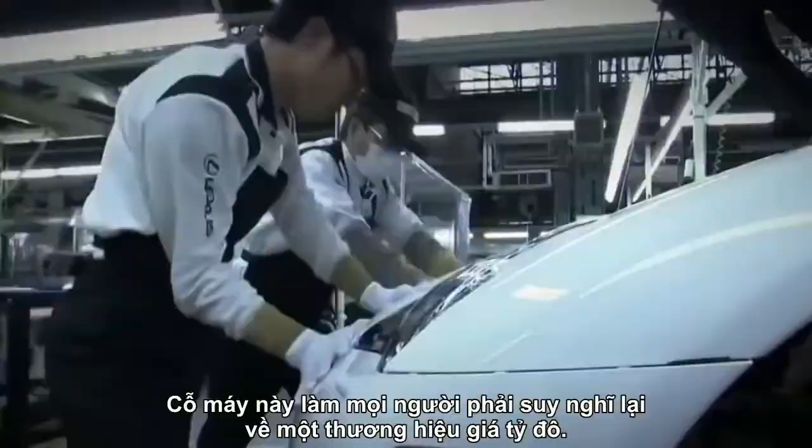A car like no other is taking shape. Craftsmen hand-build what they consider an automotive work of art. Money is no object. This machine must redefine a billion-dollar brand. Failure is not an option.

Japanese marque Lexus sells itself on luxury, marketing its cars as elegant, quiet, high-tech, and efficient. Now, a different kind of car wears the Lexus badge, the LFA. Aggressive, loud, agile, with the highest revving V10 engine in a production car, reaching 325 kilometers per hour. A car like nothing Lexus has ever produced before.

Lexus is just over 20 years old. The world's largest car maker, Toyota, created the brand to compete with other high-flying luxury marques like Mercedes-Benz, BMW, and Jaguar. It's worked. Lexus is now one of the biggest-selling high-end marques in the United States. But now, Lexus is out to inject more excitement into their brand.

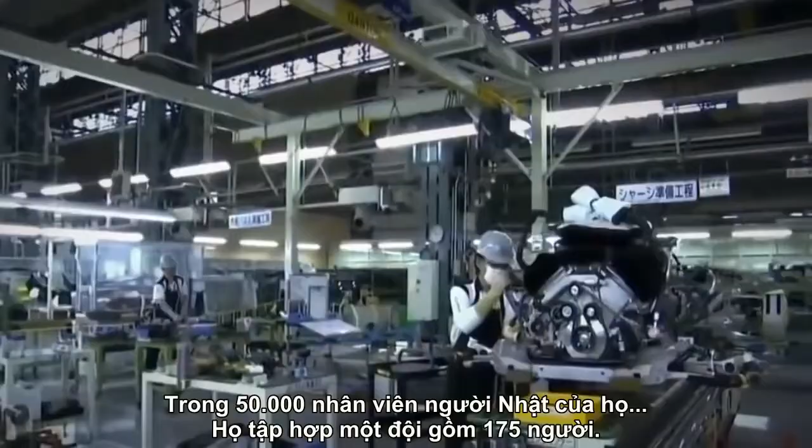The company transformed two unassuming blocks of this megafactory to create the LFA. They then scoured Toyota's 50,000 Japanese workforce to handpick just 175.

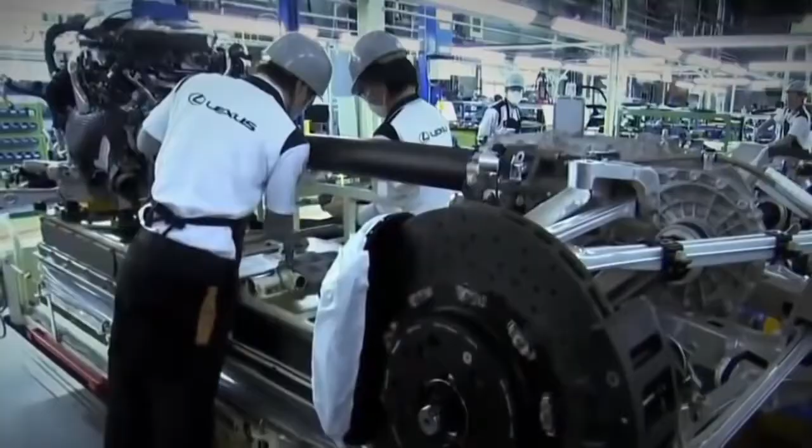All the associates here at the LFA Works feel they are artisans, not just operators. These artisans are known as takumi, Japanese for craftsmen, a status only conferred on the most highly trained, skilled workers. Each and every associate at the LFA Works is seeking to achieve perfection, taking this challenge on with a sort of samurai spirit.

Yamanaka Shigeru is manager of the LFA Works. His teamwork credentials come from another time-honored Japanese tradition, baseball. Before this, I was working as manager of the Toyota Motor Corporation baseball team, which brought people together from lots of different backgrounds. It was because I could manage that organization that I've been made manager here.

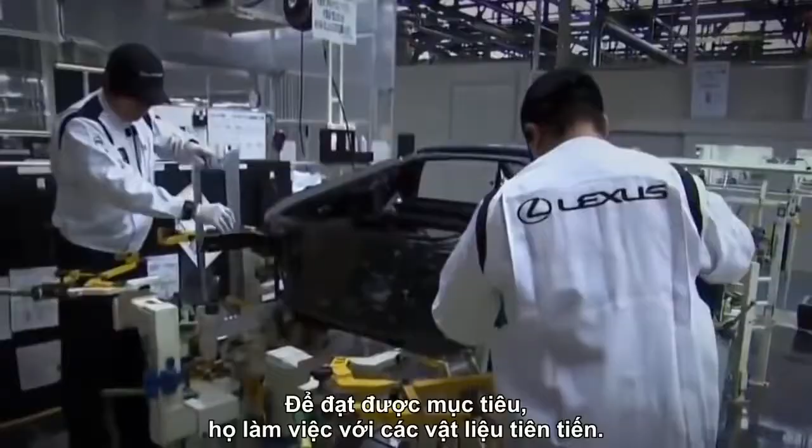To reach their goal, the tight-knit team utilizes sophisticated tools and materials to build the car. The most important of these is carbon fiber composite. Carbon is crucial to the car's performance. It's a material five times the strength of steel, yet a quarter the weight. It's the construction material of choice for both Formula One racing cars and the aerospace industry.

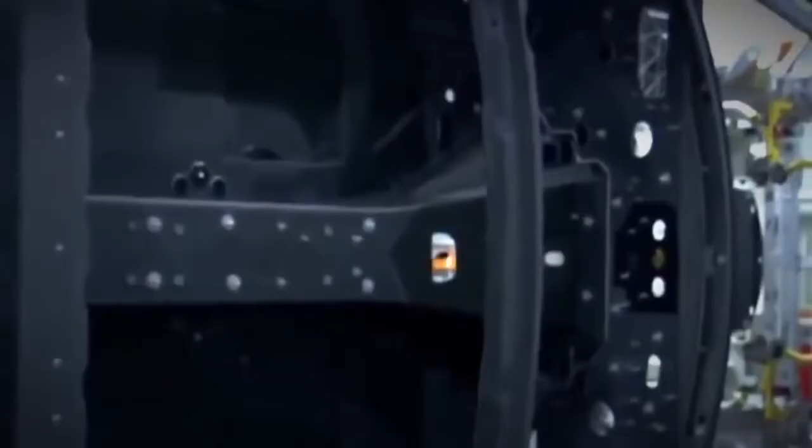The company even makes their own carbon fiber here on site. Up until now, no television cameras have ever been allowed inside this top-secret facility. First, simple strands of carbon fiber are woven into a pliable cloth using an automated weaving machine. This fabric is then transformed through heat, pressure, epoxy resin, and labor-intensive techniques into the car's core, known as the tub.

The tub is pieced together like a 3D jigsaw. It starts with the construction of the floor. To make it, precisely cut carbon fiber cloth is lifted onto a mold. Next, skilled takumi smooth the supple fabric over the mold. This one is for the transmission tunnel that will house the drive shaft and exhaust.

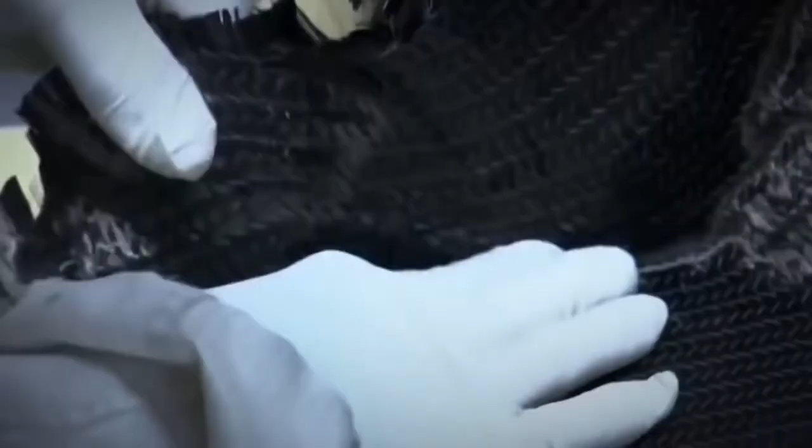In very complex areas like this, the fabric inevitably becomes frayed and not very neat. The associates work with these areas as if working with silk, taking great care every day. They also wear masks to avoid breathing in the hazardous fibers. In the beginning, the associates found it very difficult to work this material. It was much easier when they used an iron.

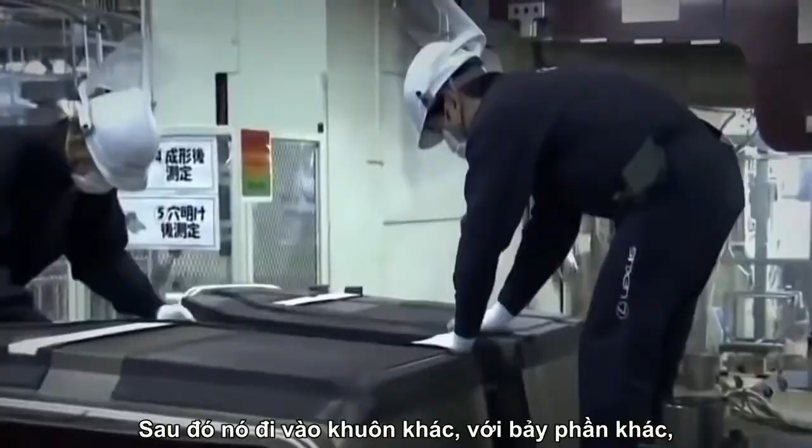The completed part is grill heated to set its shape. It's then fitted into a template, along with 7 other floor parts, and inserted into a 1,000-ton press. A glue-like resin is pumped into the template, and the whole section is baked for 8 hours at 130 degrees Celsius. Under this pressure and heat, the resin sets hard, binding the individual parts together to produce the car's floor panel.

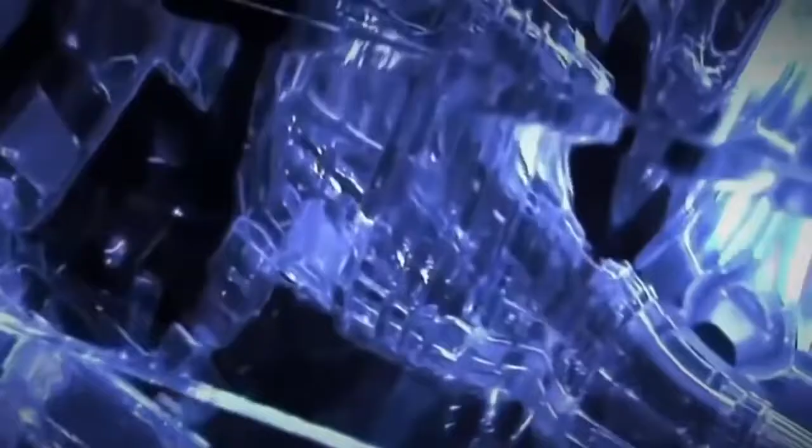Back in 2000, the concept of a world-beating supercar only existed in one man's head. At the company, I talked to just a small group of people at the top, not expecting anything, and they said, go ahead and try.

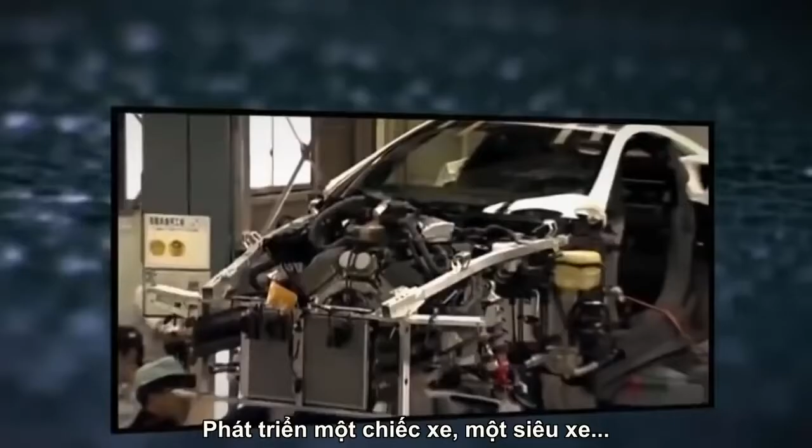With permission to proceed, Tanahashi gathers a team of engineers around him, and they start to make the basic engineering decisions. In the beginning, we planned to make the body from aluminium. But Tanahashi is fascinated with the possibilities offered by carbon. Developing a supercar, a super sports car, carbon fiber was a material I really wanted to try using, if at all possible.

But this wonder material has its drawbacks. It's expensive, and the company has never used it to build any of their cars before.

Despite these significant challenges, Tanahashi gets his way. In 2005, my boss said, why not go for carbon? Slapping me on the shoulder.

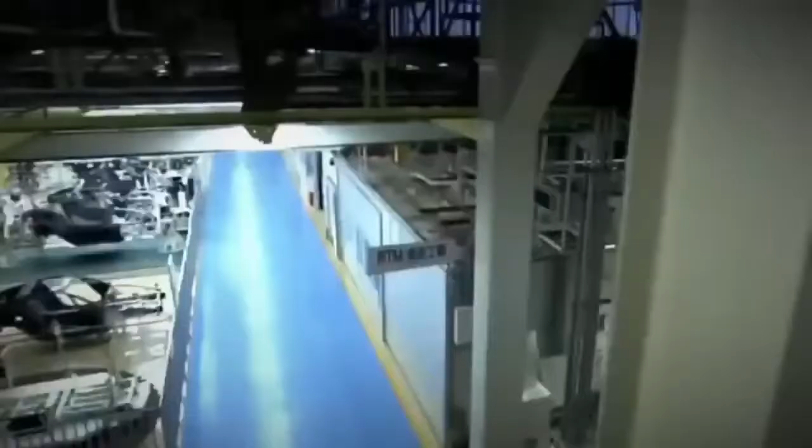And I made the decision to go for carbon then. It's a bold step. Everyone involved with this project must master a material they have no experience with at all. It was the first time the workers had touched carbon, and everything about it was difficult for the workers.

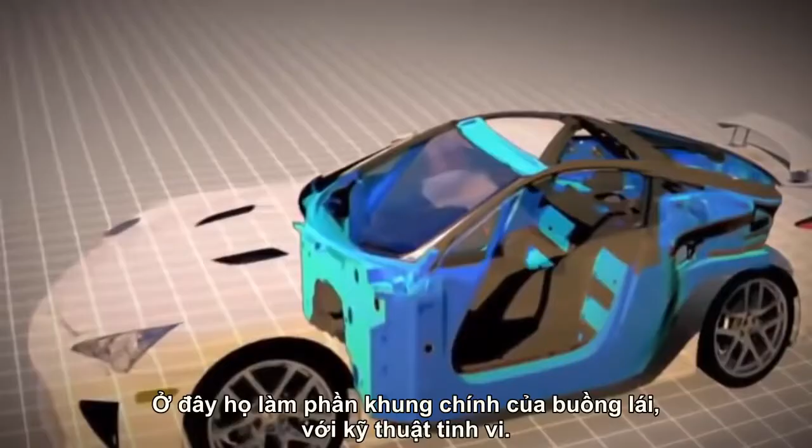In the state-of-the-art carbon fiber facility, the Takumi are returning from lunch. They vacuum themselves down to remove any foreign particles before entering a highly confidential sealed room. Here, the majority of the tub's central frame is created using the most intricate techniques.

In this process, an automated laser cuts out hundreds of individual shapes from carbon fiber cloth that's been pre-impregnated with a sticky resin.

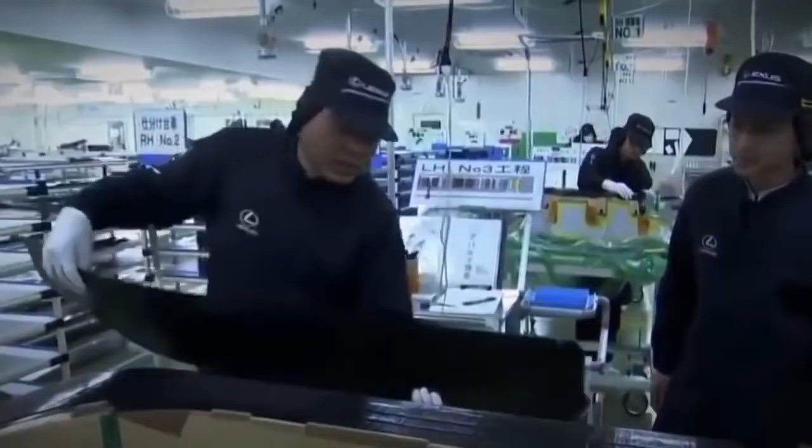Next, Takumi layer the cutouts, up to 20 sheets deep, onto a mold. This one will make the right side panel. The associate uses a dryer to raise the temperature of the laminate and half melts the resin as he applies it. The tacky cutouts stick to each other and any gaps are squeezed out using a vacuum bag that forces them together.

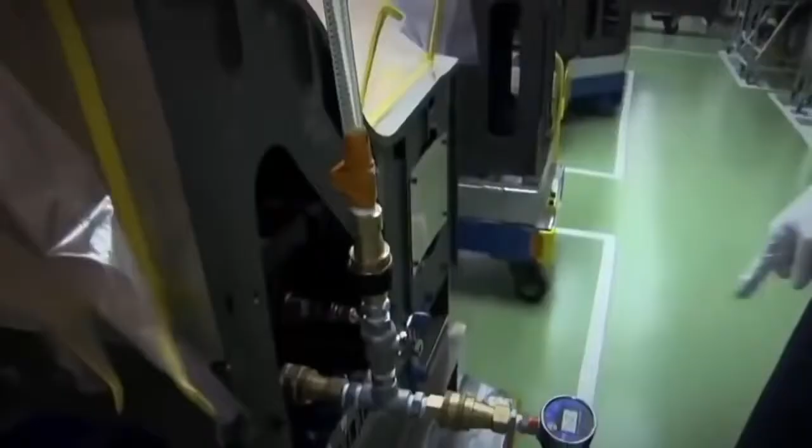The shrink-wrapped side panel is then wheeled across the works and loaded into a pressurized oven. Baking overnight at 150 degrees Celsius sets the resin, resulting in a side panel that's both ultra-strong and ultra-light. An aluminium equivalent would be twice as heavy.

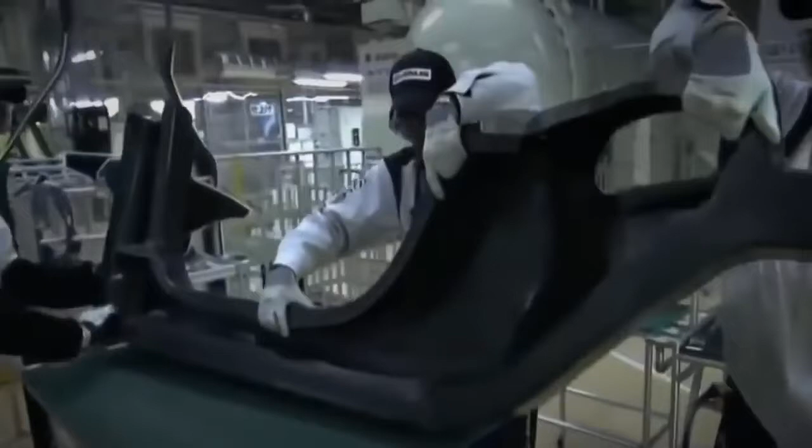Weight saving is the holy grail for all auto engineers. Less weight and more power leads to increased acceleration, and speed defines a supercar. The body of the LFA is 65% carbon fiber, helping it accelerate from 0 to 100 kilometers per hour in 3.7 seconds.

If made of aluminium, it will be 100 kilograms heavier, like having a sumo wrestler in the passenger seat. As it is, this car weighs just 1,400 kilograms all in.

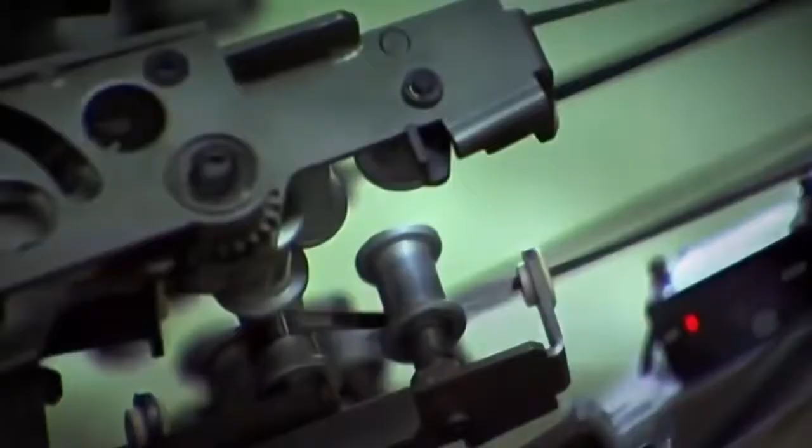Back at the factory, in a locked room, a bespoke machine creates two crucial parts to complete the tub's construction. The roof rails support the windscreen, as well as protecting the driver if the car rolls over.

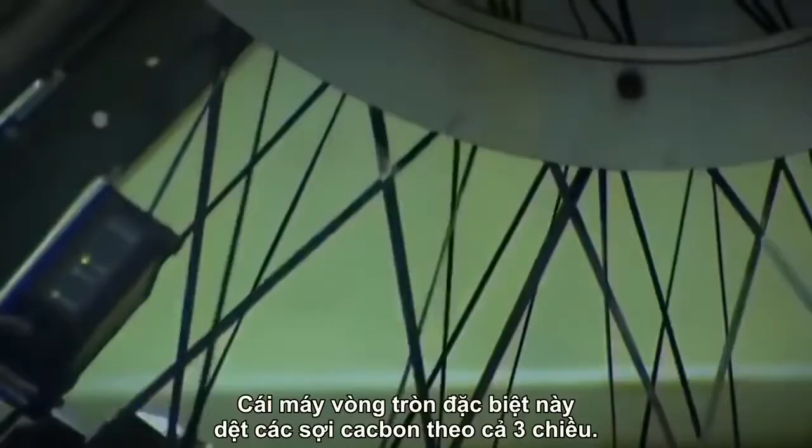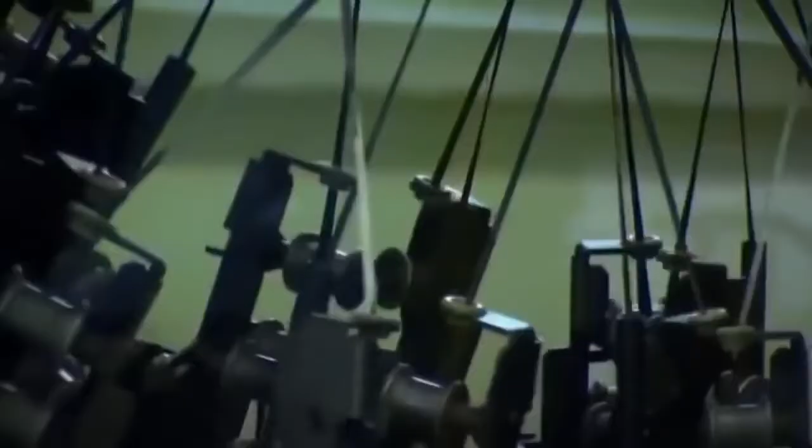This custom-built circular loom weaves the carbon rail in 3D. It uses lasers to control the feed of carbon fiber strands onto 144 bobbins. These knit the carbon around a top-secret automated template that's fed through the center of the loom. This is done twice over to cross-hatch the carbon weave, so giving the rail its strength.

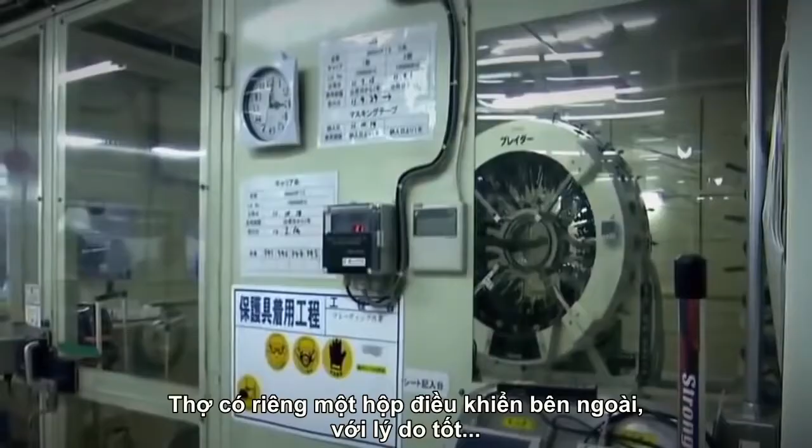The whole mechanism has its own control box, and for good reason. If something goes wrong, even a little thing, the shape gets distorted immediately, so the operator constantly pays attention to avoid this.

The side rail is heated and impregnated with more resin to complete its metamorphosis from a flexible tube to a rock-hard rail. You may think that this is quite heavy, but it is only 2 kilograms.

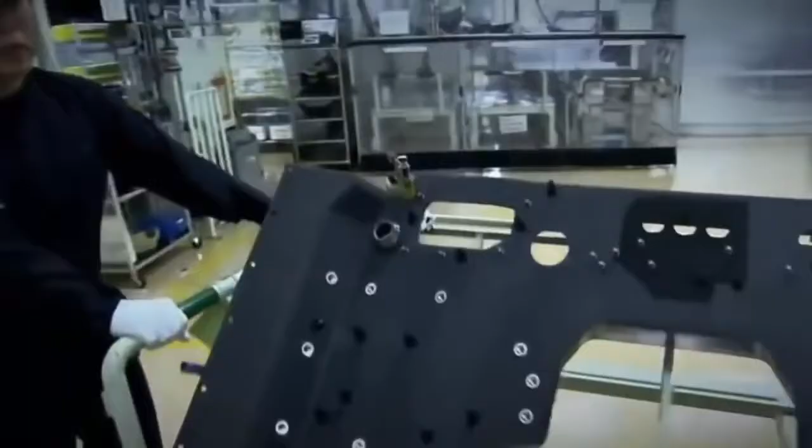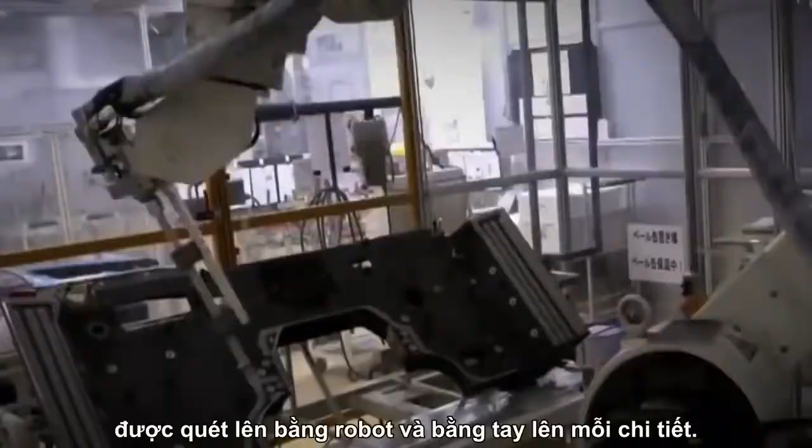The tub is bonded in another top-secret jig. First, a super-strong adhesive, known as epoxy resin, is applied by robot and hand to each of the parts. The separate parts are transferred to the jig and locked in place. Pop rivets keep the pieces aligned.

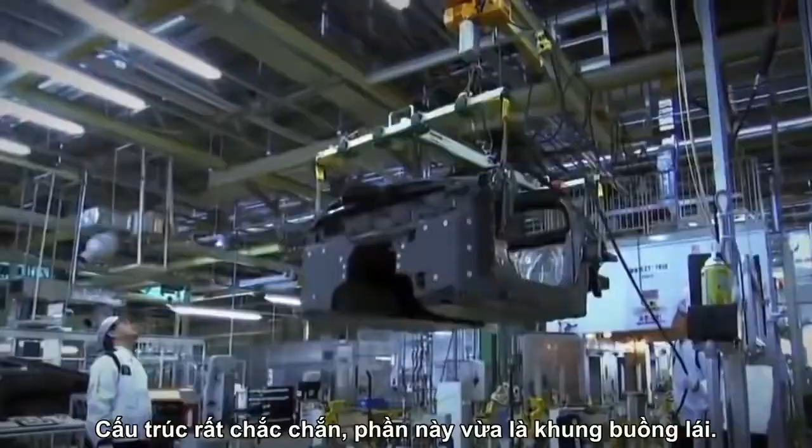To cure the epoxy, the jig is pushed into an oven and then baked for 60 minutes at 60 degrees Celsius. The resulting tub is so strong, it acts as both the structural core of the car and as a crush-resistant safety cell, should the car crash.

The challenge now is for Matsumoto Kengo, chief designer of the LFA, to create a car with a body as technical as it is elegant. For us, aerodynamics, heat and airflow management should be tangible in the design.

A conventional car cools its engine with forward-mounted radiators that suck cold air through a front grille. Not the LFA. Front space is at a premium, so coolant is pumped from the hot engine to twin radiators mounted behind the car's rear wheels.

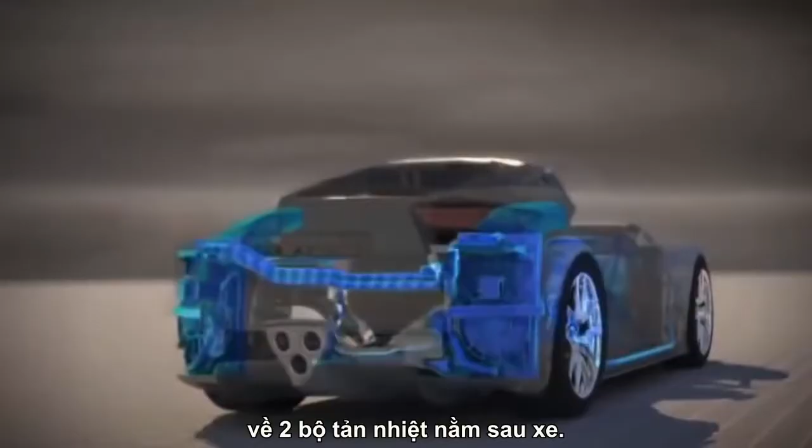Matsumoto had to shape the car to funnel cold air to these vital components. Airflow management is optimally controlled by setting the angle between the door mirror and the cabin. It goes past the cabin and smoothly into the air intake for the rear radiator.

This shape is not just for styling. The intake is deliberately formed here, from the base of the glass. The result is an airflow system capable of cooling the engine even under the most extreme race conditions.

It's 8:45 in the morning at the LFA works. The Takumi are warming up for an 8-hour shift ahead.

Their first task is to greet the bare cabin as it arrives from its 15-day build in carbon round the corner. In assembly, the cabin will progress through 4 positions: trim, chassis, final, and alignment.

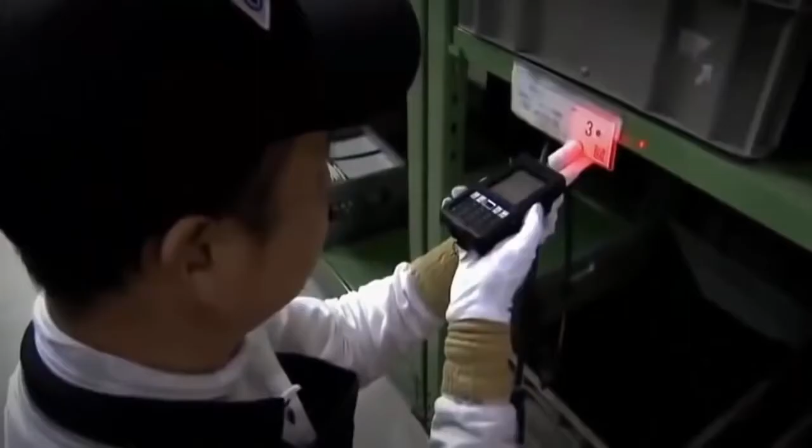15,000 parts go into making an LFA. The first of these are attached here in trim.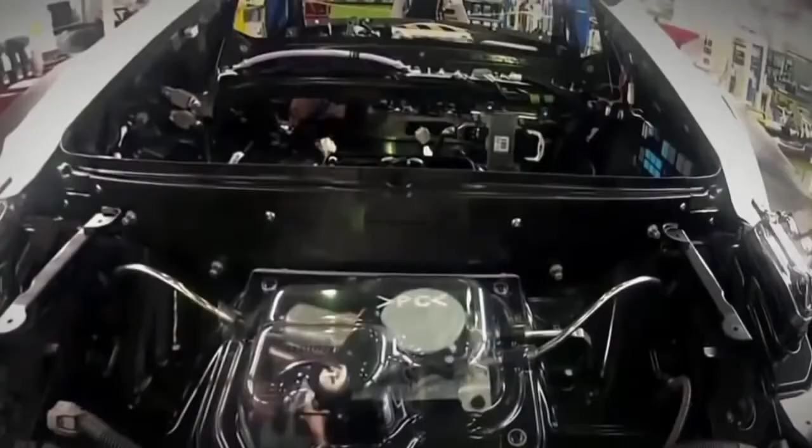Just meters away, other Takumi assemble the drivetrain and suspension. The drivetrain comprises the transmission, torque tube, and last but not least, a 4.8-litre V10.

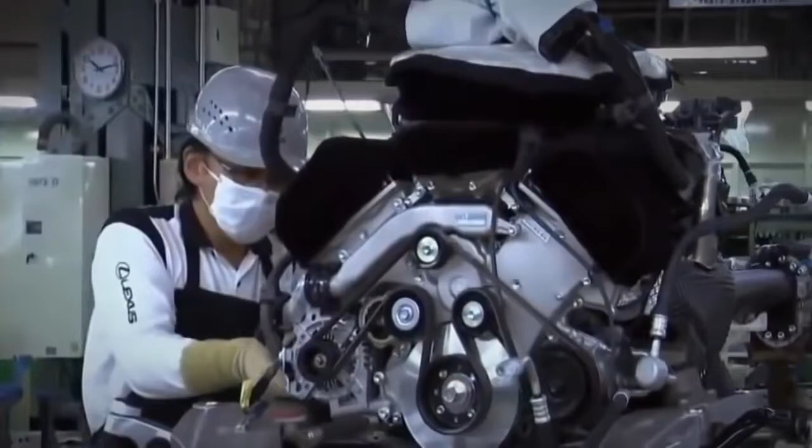The location of this engine is crucial to the car's entire concept. I wanted to build the car around the people in it. And for a supercar that puts people first, the optimum place for the engine is front mid.

This front mid location puts the engine between the driver and the car's front wheels. With the transmission placed at the rear, the driver is in the center and the car feels balanced to drive.

The aim is to make the car's handling as good as possible. But a front mid configuration dramatically restricts the space available for the engine. Tanahashi has a problem.

You need an engine of a certain size with a certain degree of compactness, but you want a high-powered engine as well. Tanahashi needs a small engine to fit in the restricted engine space, but he also needs the power of a large engine because power equals speed.

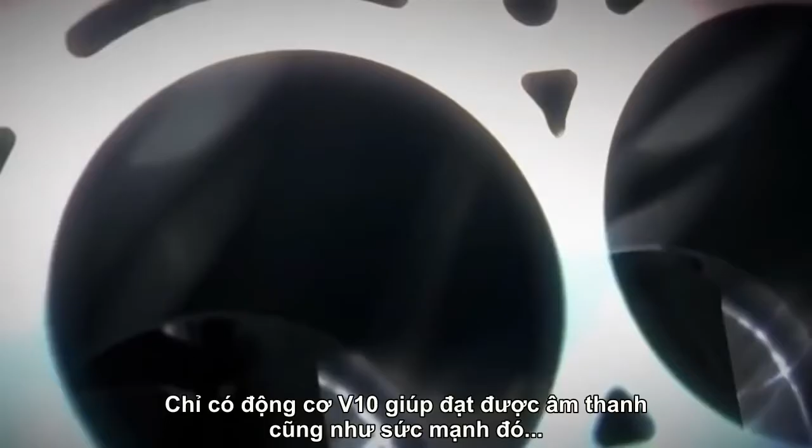And that isn't all. The high-pitched sound of Formula One makes you shiver, doesn't it? I really wanted to have that as part of the LFA. Only a high-revving V10 engine supplies this combination of power and sound, but a traditional V10 is too big for

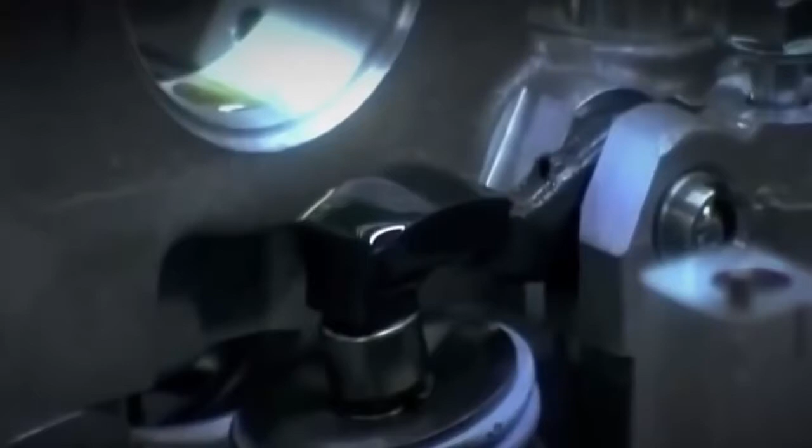his mid-front configuration. Lexus have made nothing like this before. Their production line cars use 6- and 8-cylinder engines engineered for a super quiet ride. This V10 will be the opposite.

Tanahashi turns to some old friends for help. We are a motorcycle manufacturer. We understand power alone is not enough in a vehicle. For a sports car, small and lightweight is critical.

For almost half a century, Yamaha have worked with Toyota to create high-powered lightweight engines and cars. The legendary 2000 GT, star of the James Bond film You Only Live Twice, and Japan's first true sports car, was the first fruit of their collaboration.

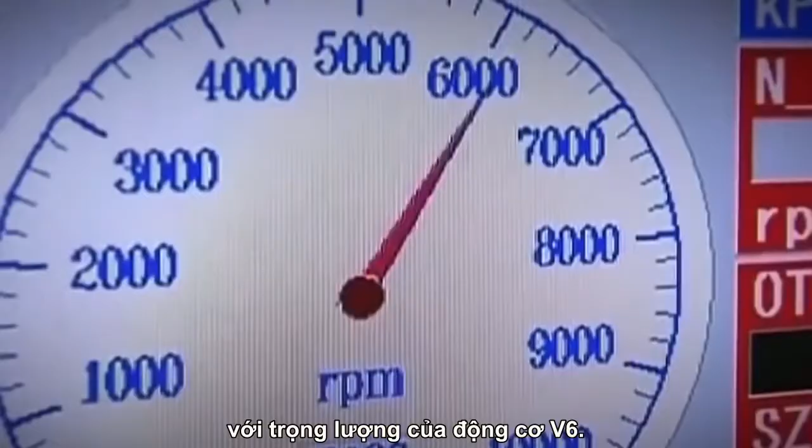Headed by Lexus engine guru Okamoto Takamitsu, the team sets itself an ambitious goal: to create a naturally aspirated V10 engine as compact as a traditional Lexus V8, with the weight of a V6. I wanted to create something different to any other supercar engine.

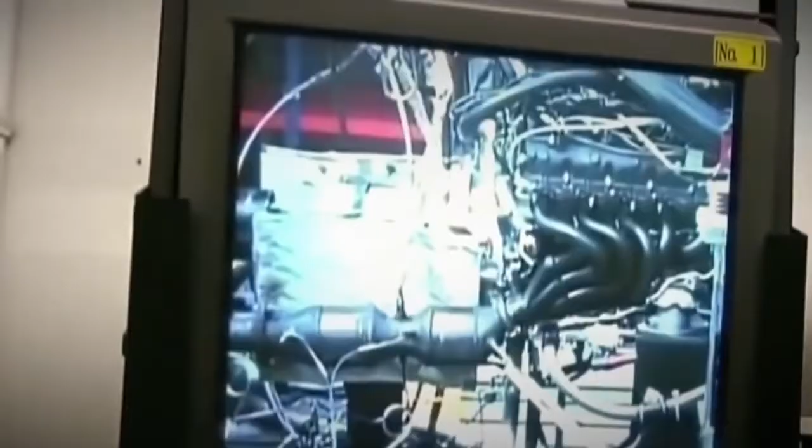Normally, engineers use turbochargers to boost the output of smaller engines to simulate V10 power. But turbocharged engines don't have the rapid response, acceleration or sound of a naturally aspirated V10.

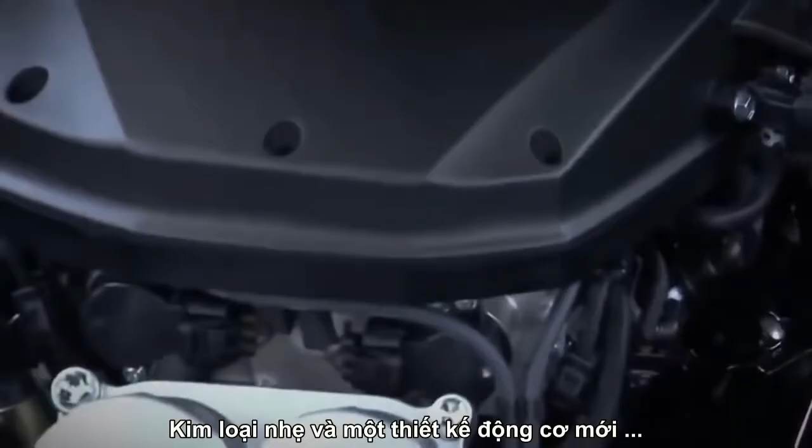By using Yamaha's motorcycle know-how, the lightest metals, and redesigning the engine's guts, Okamoto creates a masterpiece of engineering - a non-turbocharged compact V10 that fits into a mid-front design while keeping weight to a minimum.

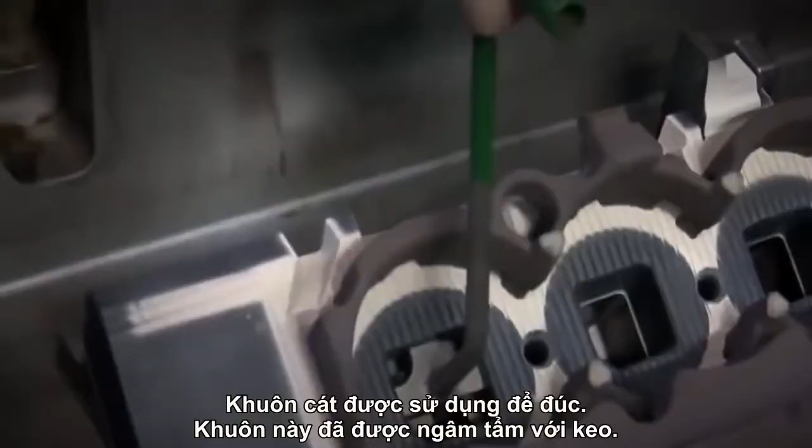The engine starts life in Toyota's Miyoshi plant as molten aluminium. It's cast in a 3D resin-impregnated sand mold made from 37 individual blocks that take a week to fashion.

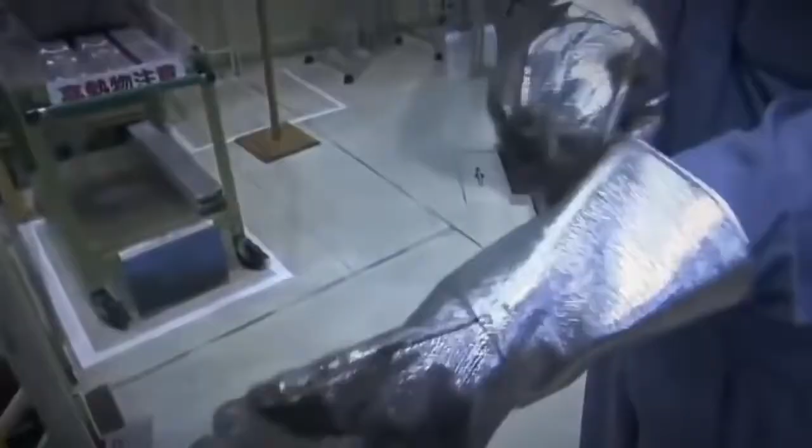With the blocks fitted together, the mold is ready to be filled. At 750 degrees Celsius, impurities are scooped off the top of the molten aluminium. The liquid metal flows into the mold as a vacuum sucks out any contaminating gases.

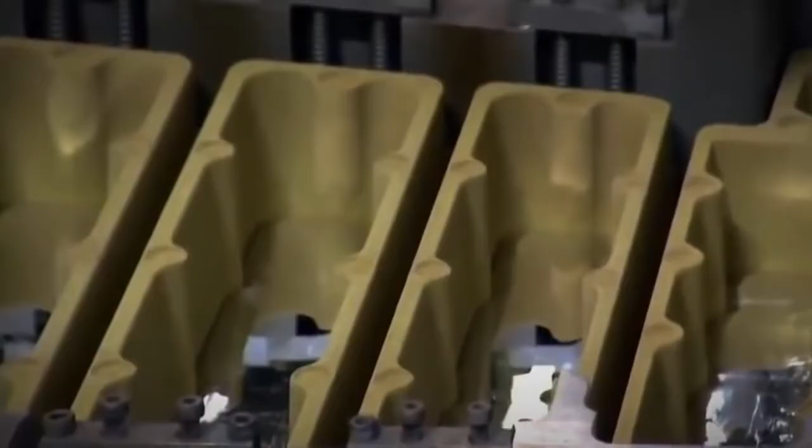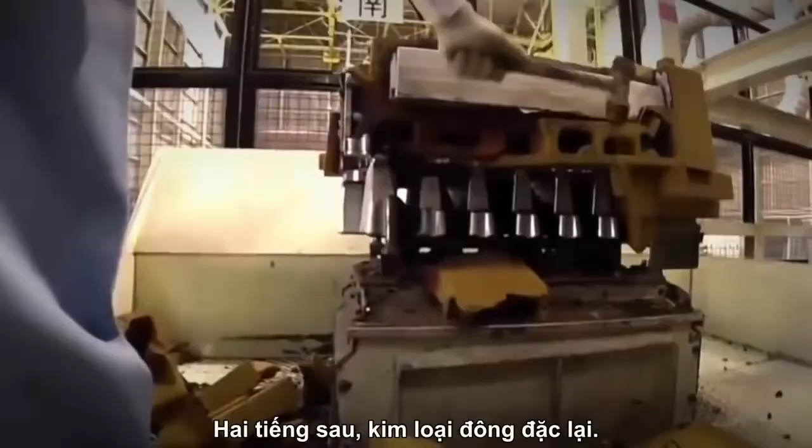Two hours later, with the metal set, the sand is hammered off to reveal the solid aluminium engine block inside. It's off to Toyota City's Honsha factory and the company's highly confidential Formula One facility.

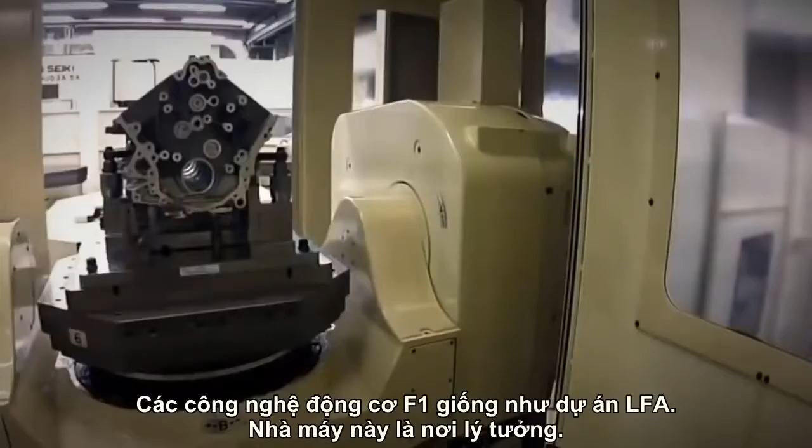But without a win in 139 races, they withdrew in 2009, leaving this state-of-the-art facility idle. For the LFA team, it was too good an opportunity to miss. The close parallels with F1 engine technology make this milling facility a ready-made fit.

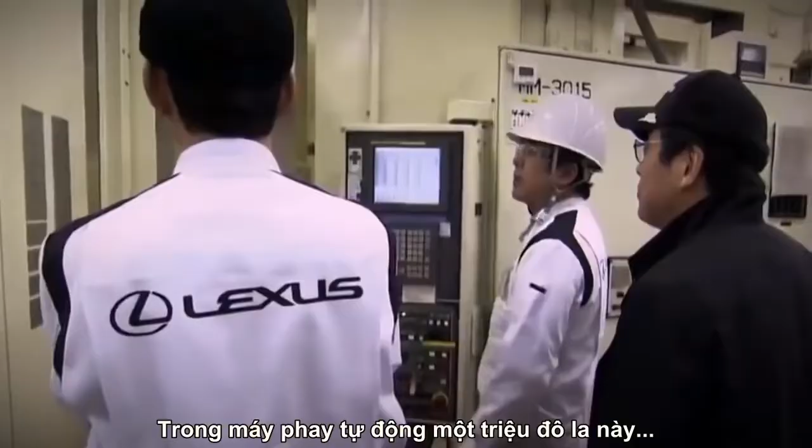In these million-dollar automated machining tools, the rough engine casts are milled, drilled and polished before emerging as precisely spec'd engine blocks.

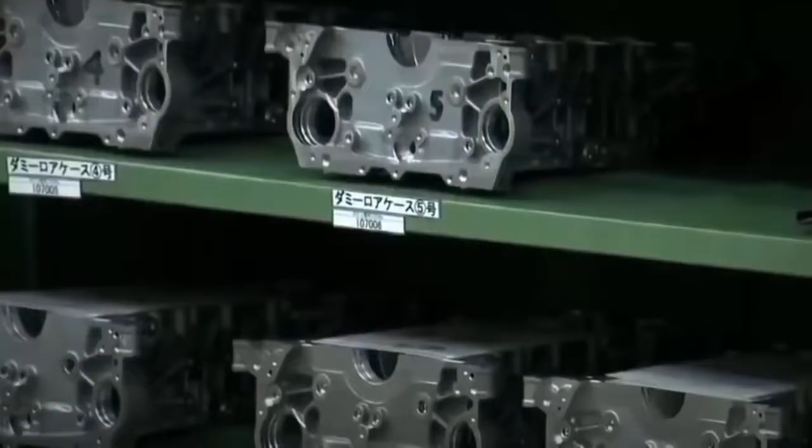Then the robots hand over to humans. In a sealed room, Takumi hone every sharp edge using precision polishing tools. Finally, a highly skilled Takumi pre-assembles the finished engine blocks to check they fit precisely.

These blocks and screws are paired for life. Disassembled, they travel as a unit to Yamaha's Iwata City plant, 90 kilometers southeast of Toyota City.

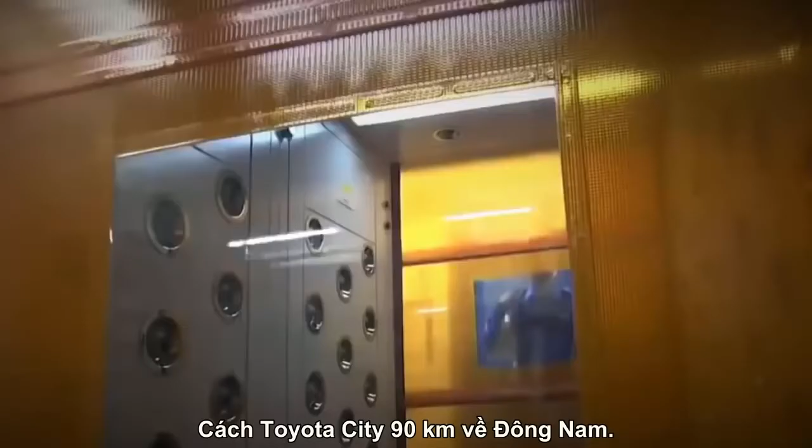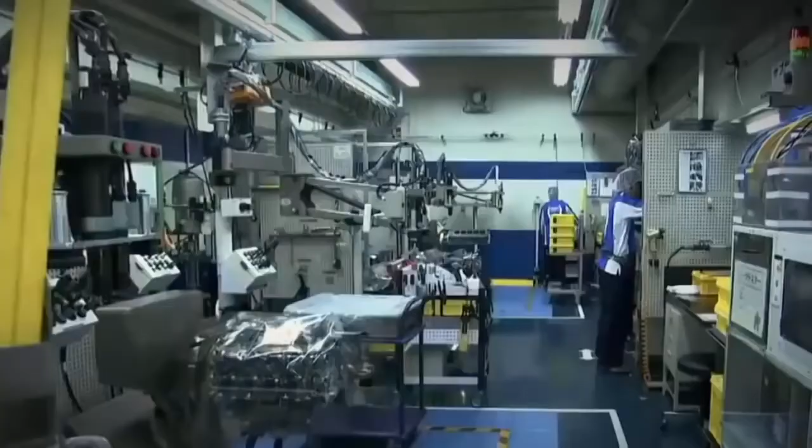The engine room here takes obsession to new heights. As you'd expect, hairnets and airlocks prevent any particle contamination. But the room is also kept at a constant temperature and humidity to ensure that every engine part is at the same state of thermal expansion during assembly. This is more laboratory than workshop.

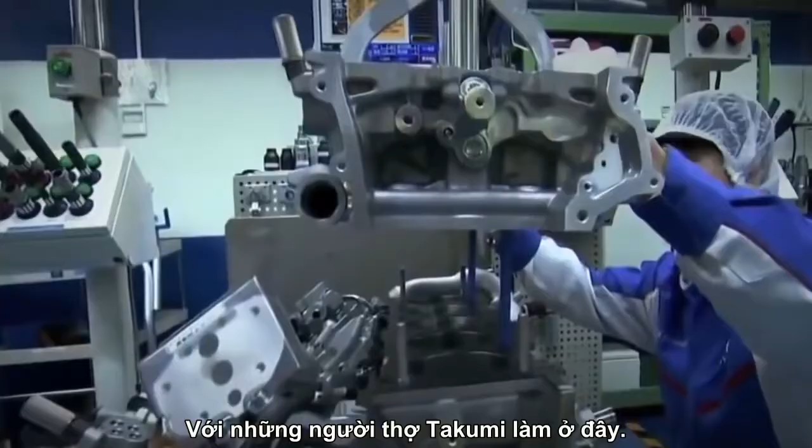The 2,200 engine parts are divided into 61 different kits for assembly by number. 4 highly trained Takumi work here. Each is responsible for a single engine from start to finish.

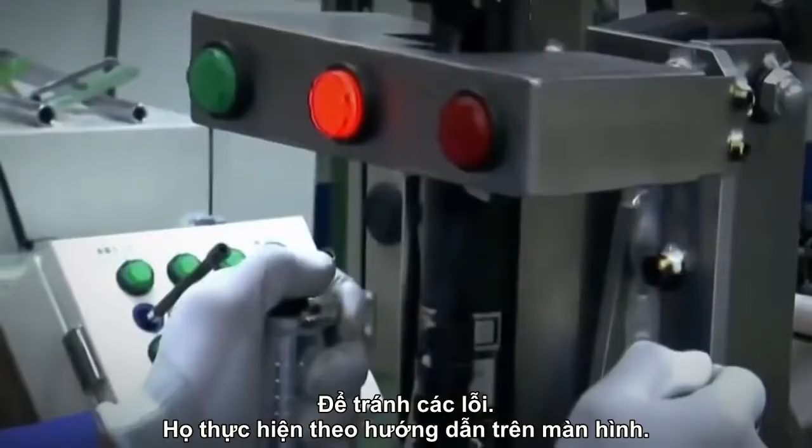To avoid any mistakes, they follow a series of on-screen instructions. It takes 2.5 days to complete the build of one engine.

Each hand-assembled engine bears the Takumi signature.

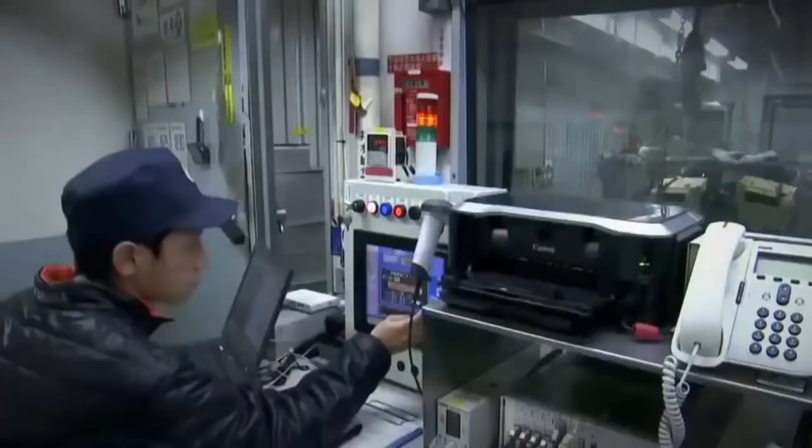Before this masterpiece goes anywhere near a car, it undergoes a half-day of exhaustive testing in the room next door to engine assembly. The resulting 4.8-litre engine is so responsive that it takes just half a second to reach 9,000 RPM.

That means instant acceleration, whatever gear you're in. This engine has excellent response and more RPM than any other commercially available engine. Response time is so fast, that a digital rev counter is the only unit able to keep up.

And the sound of this high-revving engine is unmistakable. The sound of the LFA is unique, and once heard, never forgotten. To achieve the engine soundtrack that Tanahashi insists upon requires more of Yamaha's specialist knowledge.

We are a manufacturer of musical instruments, so when it comes to sound technology, we have a certain level of know-how.

Honji Yoshikazu is obsessed with sound. I think the relationship between a super sports car and its driver is like the relationship between a top musical performer and their instrument. When they play in a certain way, they can listen to that sound and use it to produce another, better sound.

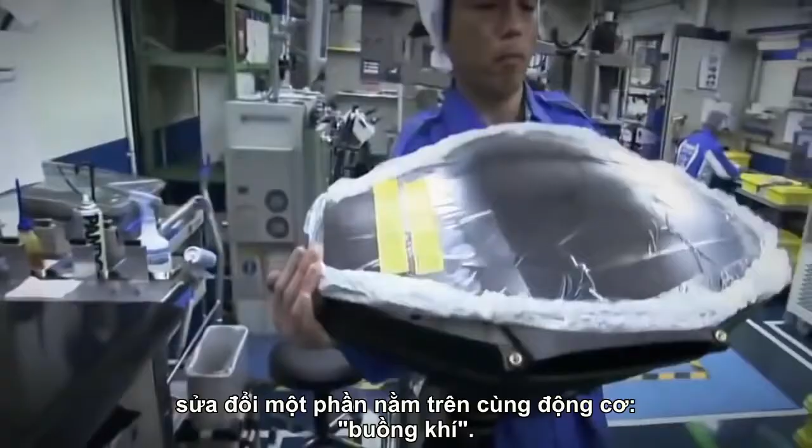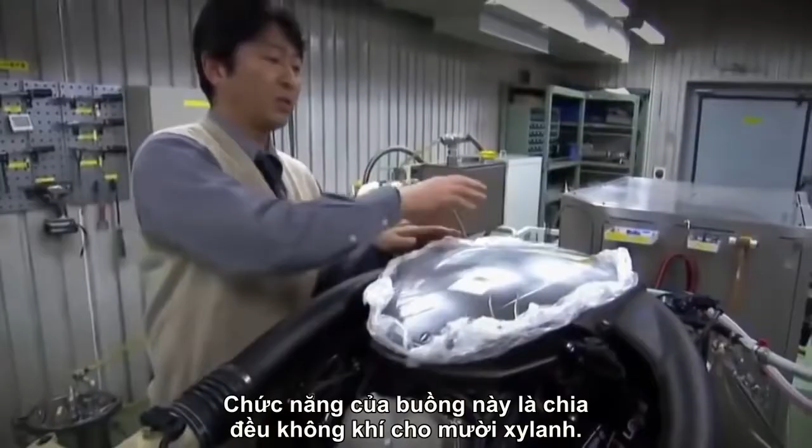To refine the driver's soundtrack, Heiji Maruyama, general manager of Yamaha Motors, had to redesign the component that sits on top of the engine, called the surge tank, by turning convention on its head. The function of the surge tank is to send air equally into all 10 cylinders.

Normally, techniques to reduce noise from the intakes are used. We thought to go the other way and use it to amplify the sound, to communicate it to the driver. Maruyama tunes the chamber by varying the thickness of the surge tank's upper surface and adding internal vibrating ribs.

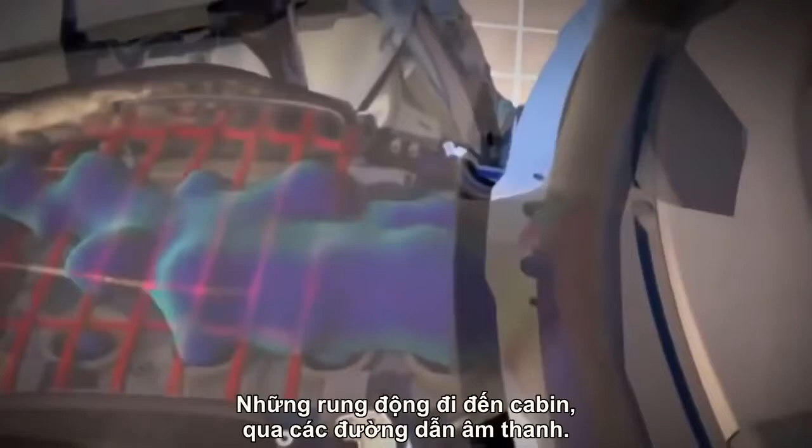The construction is very like that of an acoustic guitar or violin. The team channel these good vibrations back into the cabin using sound passages. We use these to send low-pitch sound to the driver's feet and higher frequency sounds through at ear level. The driver is in the middle of this dynamic surround sound system.

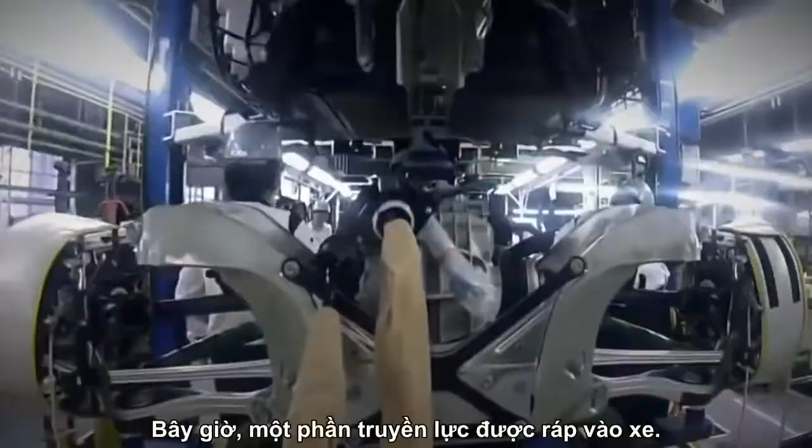The completed engine is forklifted onto a waiting truck for shipment back to the LFA works. Here, as part of the assembled drivetrain, it's inserted into the cabin's belly, guided only by eye.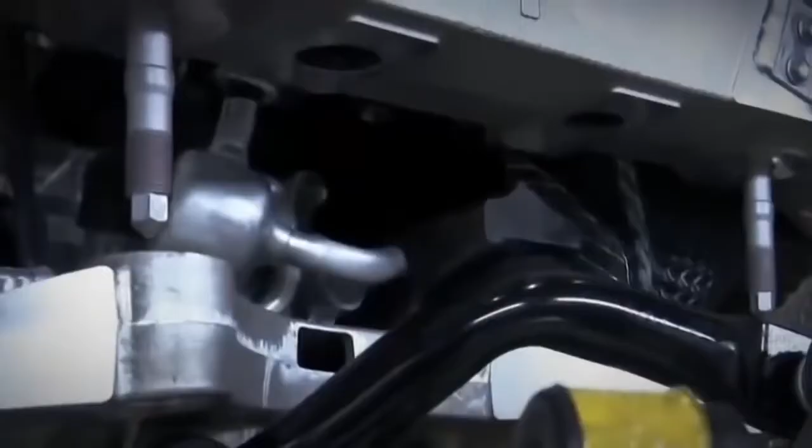With the guts of the car in place, it's time to feed them. An automated pump injects engine oil, brake fluid and coolant into the appropriate underbonnet opening.

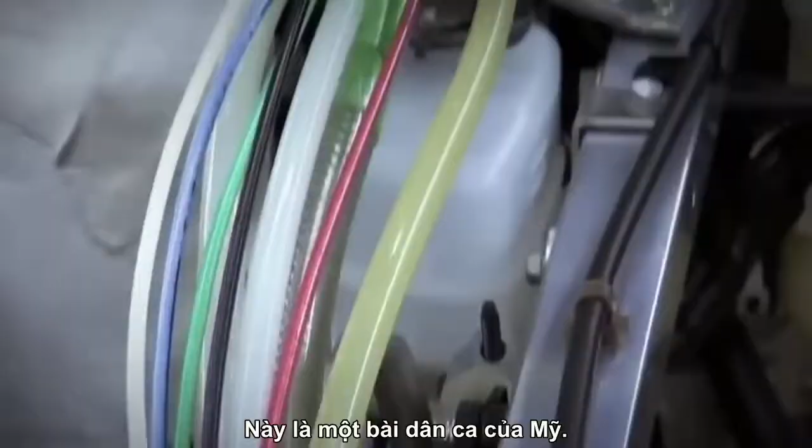In Japan, machines play a tune to alert anybody nearby that they're running. This one plays an American folk song. With the precise volume of fluid added, the pump stops, as does the music.

The car's 9 moulded glass fibre body panels are manufactured off-site. This material is both strong and light, but far cheaper to replace than carbon fibre, should the car crash.

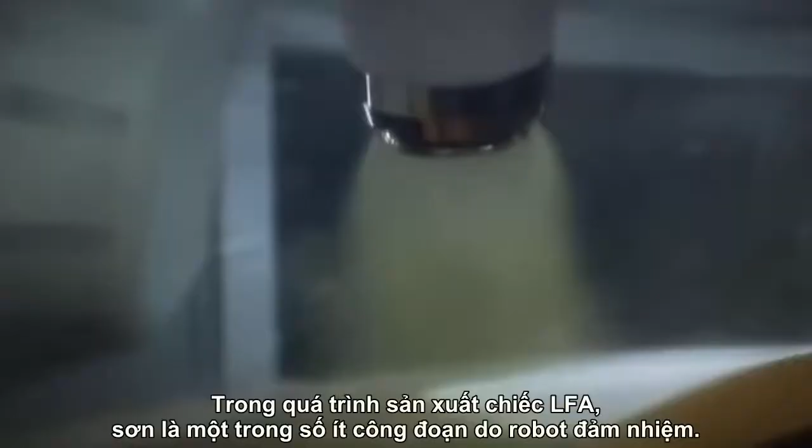The paint shop is under the same roof as assembly, but it's a very different world in here. At the LFA works, paint is one of the few production processes performed by robot. The company believes they give a more consistent finish.

But there's always an ongoing human battle in the paint department. Dust is the greatest enemy for painting. If dust gets into the paint surface, when it's heated, the dust swells up and causes a blister. So the atmosphere is controlled on a daily basis, and there's a strict dress code.

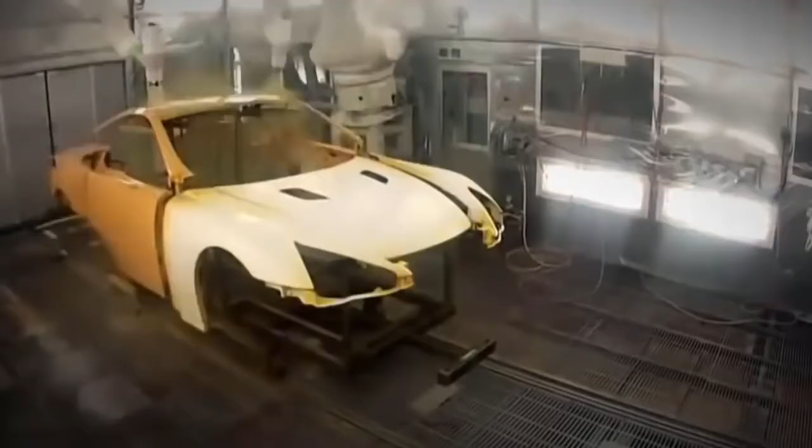Up to 5 layers of paint are applied. And where robots can't reach, humans can.

Job done. The sprayed panels are dried in an oven at 100 degrees Celsius for 50 minutes before being wheeled out for inspection.

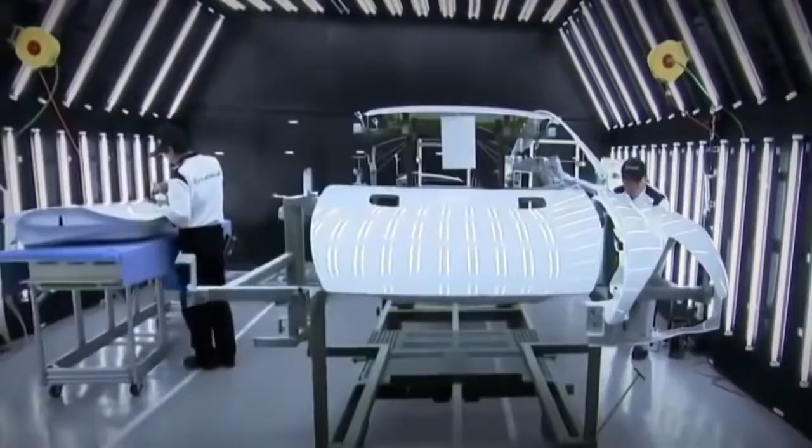The battle against dust continues, with water nozzles spraying a fine mist into the air to stop anything drifting onto the pristine surfaces. A bright light inspector spots any blemishes and marks them up to be polished out.

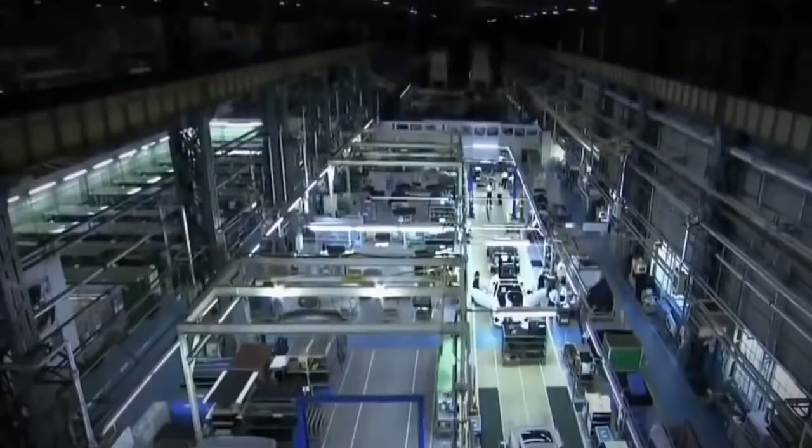The completed panels are wheeled out of paint across the factory floor and attached to the carbon tub back in assembly at the third position on the line, known as final. Here, the hand-stitched leather interior is installed, and the forged aluminium wheels with bespoke Bridgestone tyres are also fitted.

It looks as if the associates are performing each task very slowly, but every one of them is working very carefully and with a high degree of certainty. If you compare it to a sport, they are top players who complete a successful play every time.

The LFA works runs like clockwork, yet there's no clock watching. The reason why there is so much time is that Chief Yamanaka tells us to take our time and work slowly, so that we can make something that we know is good.

How can I put it? He says that in order to ensure quality, we can take as much time as we need. That goes for overtime as well. If it means we make something good, then we can do overtime.

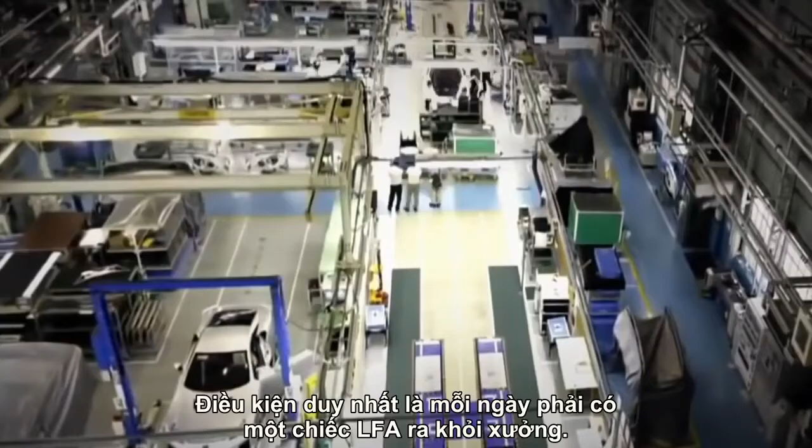The only stipulation is that one car must drive off this assembly line every day. And from the beginning, Chief Engineer Tanahashi was clear that only 500 would be built. At a car a day, that will take just 2 years. And then, this factory will close.

Making only 500 cars positions the LFA as a very special car. There is no plan to make any more at all.

Even pricing the LFA at $375,000, the most expensive Japanese road car ever, a limited production run isn't going to recoup the costs of development, the use of cutting-edge materials, and unlimited overtime.

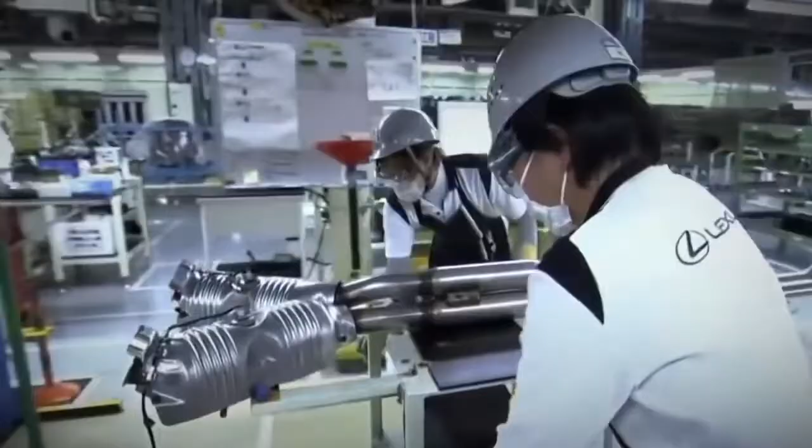I think it will be difficult to make a profit with only 500 units delivered. But by producing the LFA, the Lexus brand gains in value and is well received worldwide.

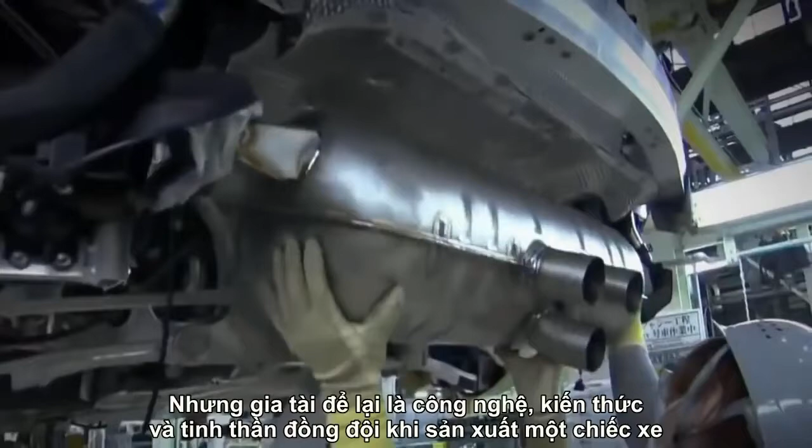I think the legacy will be left in technique, knowledge and teamwork for making cars that will please our customers in the future.

Back in 2004, with the prototype built, Chief Engineer Tanahashi takes a bold decision. He wants the car proved on the severest of tracks. Nothing in Japan fits the bill, so he takes the entire development team to the notorious Nürburgring in Germany.

For us car makers, the Nordschleife on the Nürburgring is like a mecca for cars. This is where this car was honed. The 20-kilometer Nordschleife section of the Nürburgring is infamous as the world's most punishing test track.

For 4 years, the team tests every aspect of the car's engineering around the Nordschleife's dips, jumps, relentless corners, and flat-out straights.

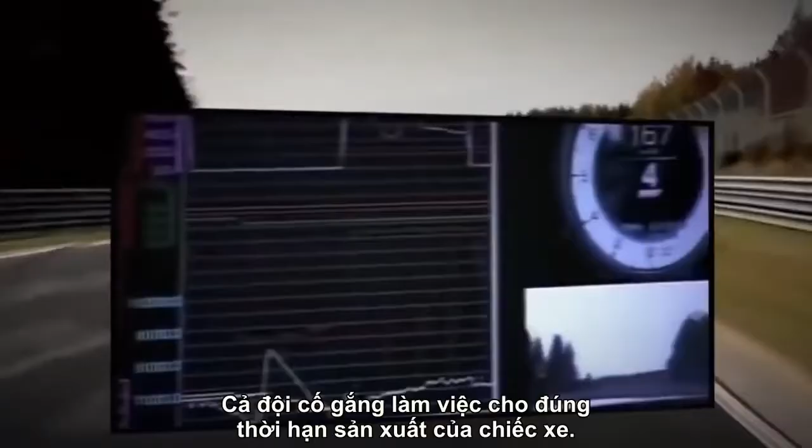The car's development makes progress towards its production deadline, but Tanahashi wants to fast-track its fine-tuning. In 2008, he throws it into the unforgiving world of racing and enters the Nürburgring 24-hour race. It was purely to get more feedback on the production type LFA and to improve it under real race conditions.

The brutal experiment works. A year later, the revised car wins its class. Tanahashi is finally happy, and in 2010, the LFA goes into full production.

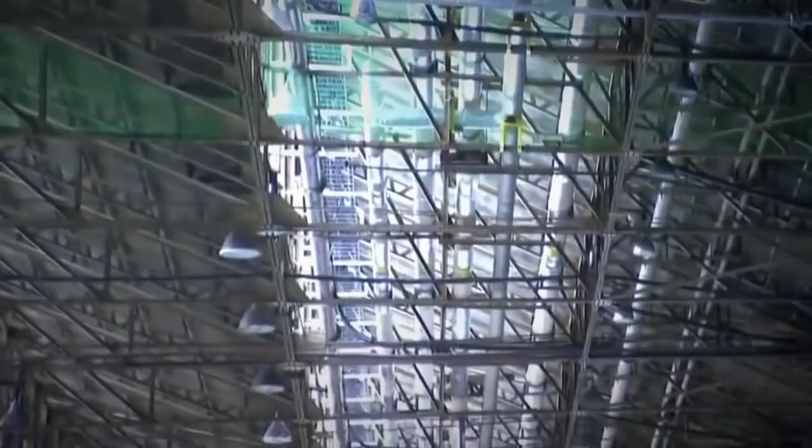And when in 2011, a special race edition of the standard LFA is launched, its name pays homage to the racetrack that forged it. It is with thanks to that sacred place that we called it the Nürburgring package.

This Nürburgring package has a retuned engine which pumps out 571 horsepower, 11 more than the standard engine. This extra power requires more downforce to keep the car on the track, so the rear spoiler is larger and fixed.

And left and right canard fins on the car's front bumper also increase downforce. The stiffer lower suspension makes it more suitable for a life on the track. Finally, to increase acceleration, the computerized transmission is upgraded to change a split second faster.

It all adds up to a Japanese supercar. Only 50 will be built, each with a price tag $70,000 more than a standard LFA.

Back at the LFA works, in assembly's last position, the wheels are aligned to ensure the car handles perfectly. After 3 days in assembly, the car officially moves to inspection. The inspection process involves 7,000 separate checks.

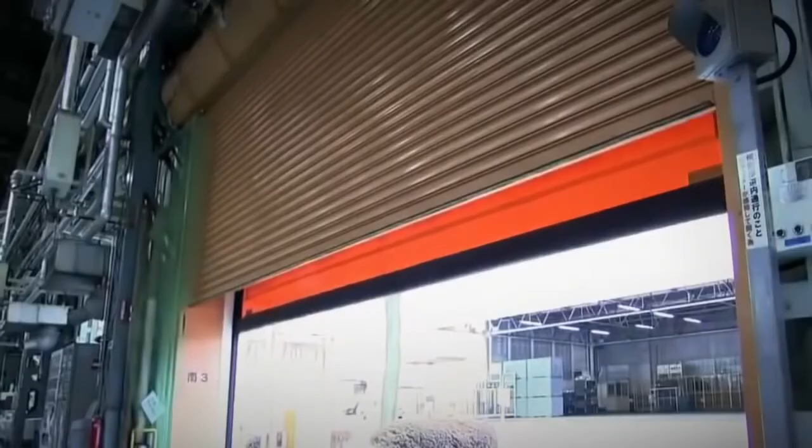With the internal and external surface inspection signed off, the car leaves the LFA works for good. It's driven through the Motomachi plant into quality control. This will be its home for the next 7 days.

The checks performed here range from speedometer and brake tests to water tightness. The reports fill a 350-page booklet.

Finally, test driver Amano Nobuaki ensures each of these cars is road ready when it leaves the factory. The car is bedded in on Motomachi's very own test track. The masked sections of the bodywork are to protect vulnerable areas from stone chips.

I think this is the best possible job in the world. Amano checks the car's controllability, engine sound, power, braking performance and vibration noise on the 1 kilometer track.

There is one danger driving this car every day. Every now and again, I just want to forget the job and drive this car away somewhere to have for myself.